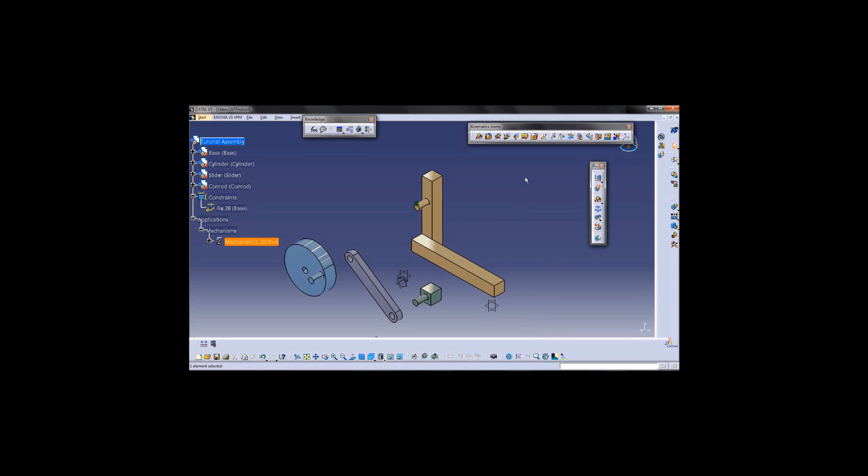To fix the part, select the part and you'll see a green anchor appear next to it, confirming that the part has been fixed. We can now go ahead and create our first revolute joint between the cylinder and the base.

To create a revolute joint, we require two lines and two planes. The lines we are going to use today are going to be the center line of the hole of the cylinder and the center line of the protrusion on the base, and the planes are going to be the corresponding planes, that is the plane at the back of the cylinder and the front of the base.

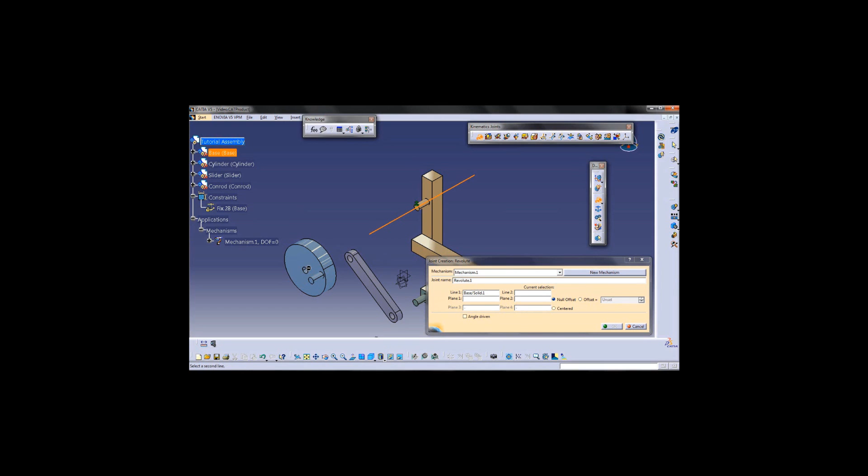To make sure that you've created the joint correctly, click the update button and say OK. If the parts move together as expected, you have successfully created the joint.

Now let's create the prismatic joint between the slider and the base. The prismatic joint is much like the revolute joint. You require two lines and two planes. The lines you're going to select are going to be the top front edge of the base, the front bottom edge of the slider, and the two planes are going to be the corresponding planes, that is the planes at the bottom of the slider and the top of the base.

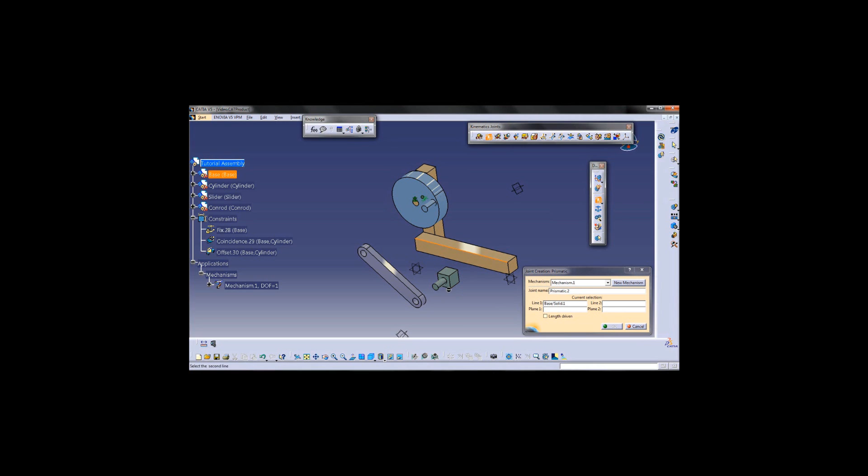We also need to create a revolute joint between the cylinder and the conrod. For the two lines, we are going to use the center line of the protrusion and the center line of the hole of the conrod and the corresponding planes.

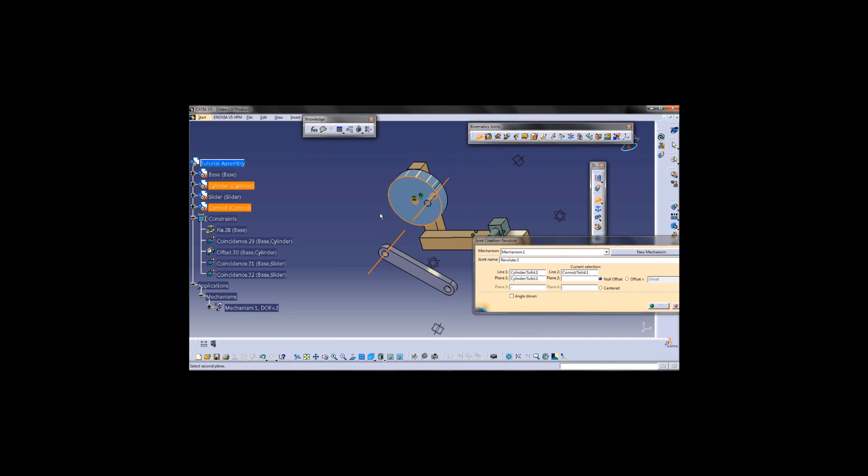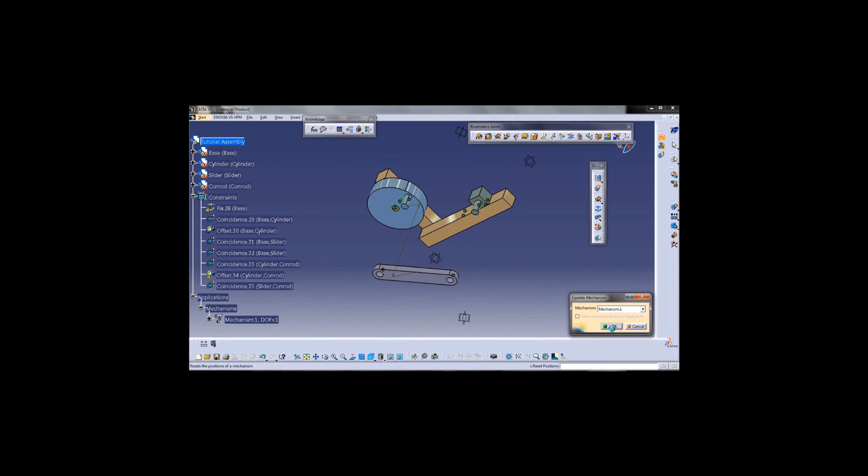We also need a cylindrical joint between the protrusion of the slider and the hole of the conrod. As you can see, the mechanism sits together as expected.

Even though all the joints are created, the degree of freedom is still 1, indicating that this mechanism cannot be simulated. To successfully simulate the mechanism, we need to make the degree of freedom 0 by creating a command. The driving command we will use is going to be for the revolute joint between the cylinder and the base. To do this, double click on the revolute and check the angle driven box.

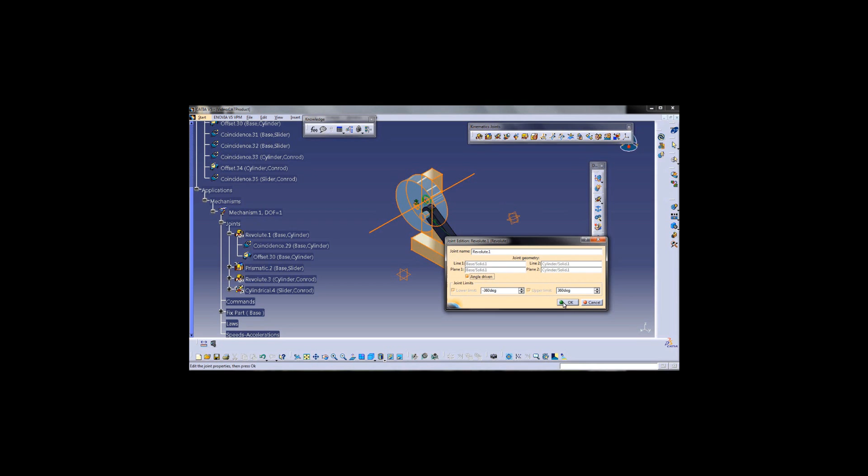Now click OK, and you can see Catia informs us that the mechanism can be simulated and the degrees of freedom have gone to 0. To create a simulation, click on the simulation button and select mechanism 1. To automate the simulation, click insert and automatic insert and change the loop mode as shown.

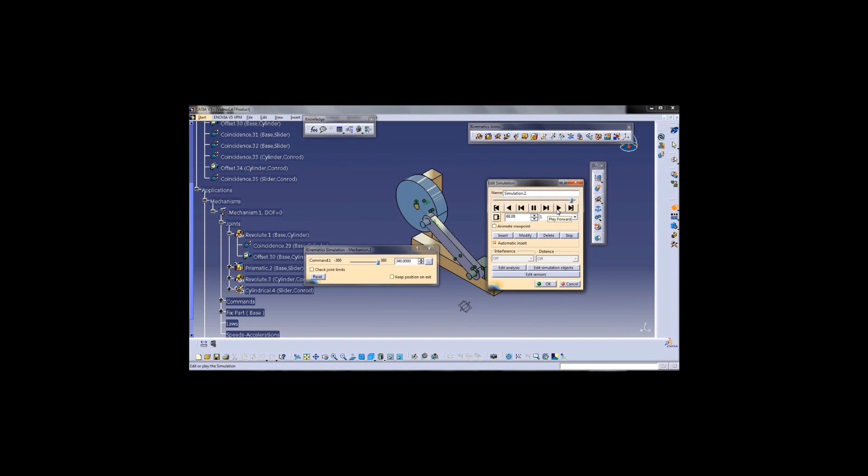Now run the simulation once and hit play, and Catia will replay it for you. As you can see, the simulation runs successfully.

Now that we have created a basic simulation, let's see how to create a simulation where the speed and timing are governed by us by laws that we have inserted using the knowledge-ware toolbar. To do this, we're going to use the relationship theta, the angle, is equal to the angular velocity times time. The angular velocity we're going to use for today's tutorial is going to be 360 degrees per second.

To insert the law, click on the formula icon in the knowledge-ware toolbar. This is indicated by the f of x icon. To show the relevant parameters, click mechanism 1, and you see that the two parameters that we need, that is the angle and time, are displayed. We're going to add a formula to the angle.

Again, there are a lot of parameters here. To show only the required ones, click on mechanism 1. We're going to make angle equal to the angular velocity, which is 360 degrees per second, times the time. Once you have done this, click OK.

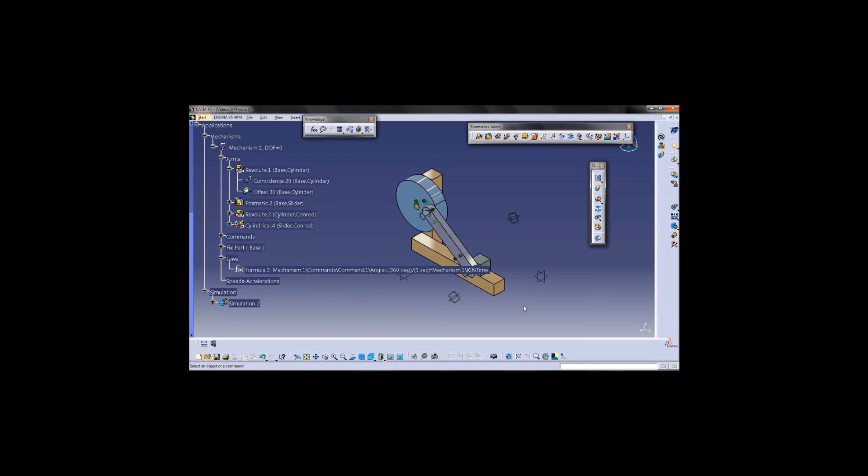Once we have created a law, you will see that the law branch of the specification tree has been populated with our formula. We now need to create acceleration and speeds. That is, we need to select the part that we wish to analyze and whose acceleration and velocity we are going to graph today. To do this, click on the speed and acceleration icon.

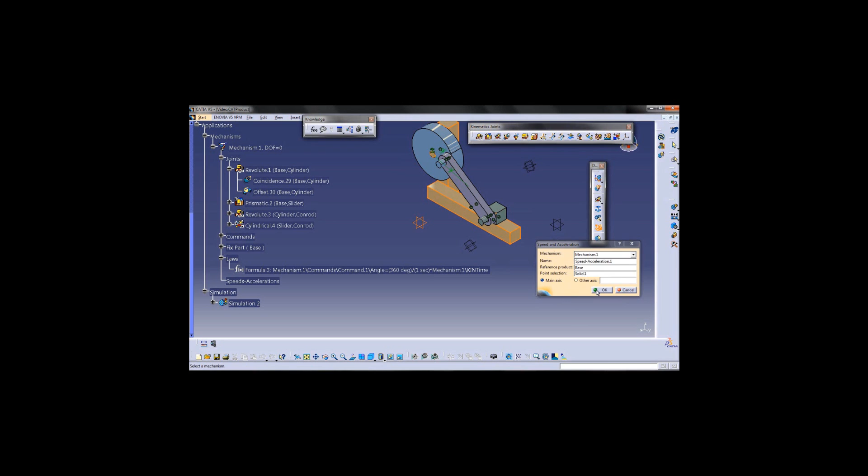The reference product is going to be a fixed part, which is the base, and the point that we are interested in, that is the point whose linear acceleration and linear speed we are going to plot versus time today, is going to be the top right vertex of the slider. Once you have clicked OK, you will notice the specification tree has been updated under the speeds and acceleration branch.

We are now ready to create a simulation with law. To create the simulation with law and to get the graphs you need, click Activate Sensor. This will show you the list of variables we can plot with respect to time. Clicking on a parameter changes the observed column from no to yes, meaning that Catia will now plot it for you. Clicking it again puts it back to no.

Today we are interested in the linear speed and the linear acceleration of the slider. But you should be careful and make sure you're doing it along the right axis. Today our slider is moving along the y-axis, so we should click linear speed and linear acceleration in the y direction.

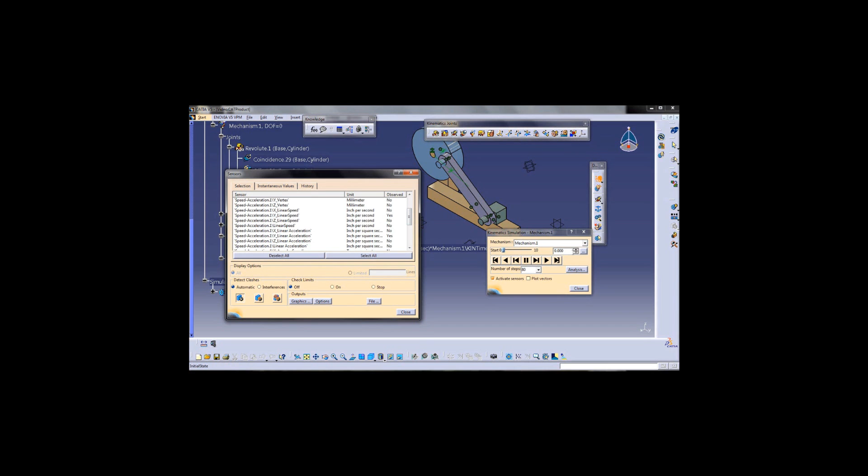Once you have done this, run the mechanism once to update the data. As you can see, the simulation is going to run for 10 seconds. We can change this if we want by clicking on this icon and changing the time.